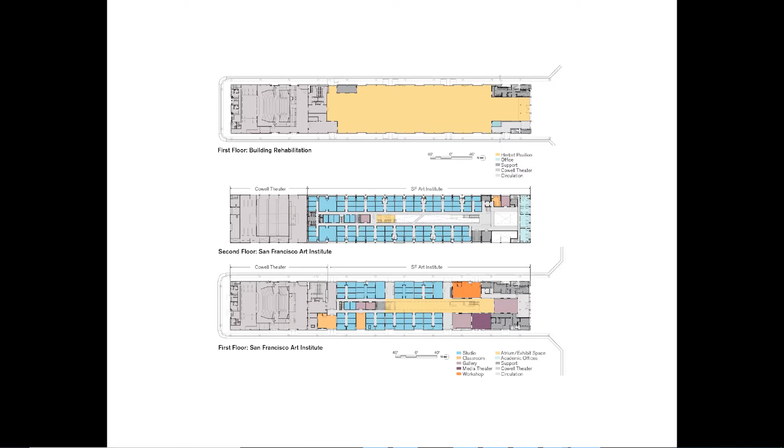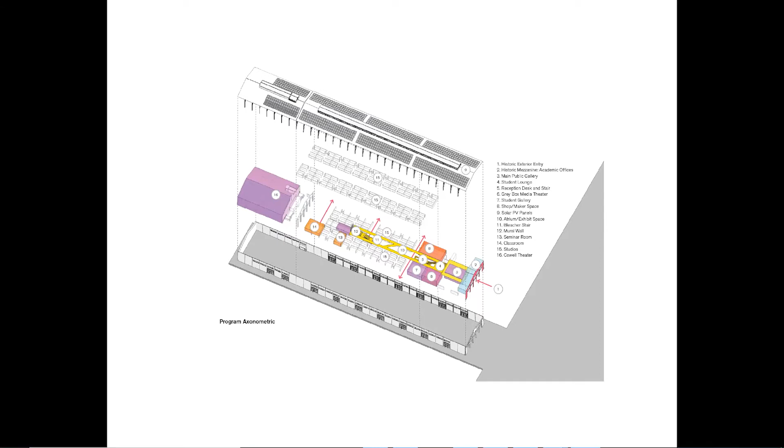And for the classrooms, the second floor needed to be built. Because the historic fabric was really a shed, the second floor had to be pulled away from the exterior walls. Adding the second floor required both the state and the federal historic preservation offices to collaborate. The second floor required additional support columns. The center needed to be kept open so that natural light floods into this space.

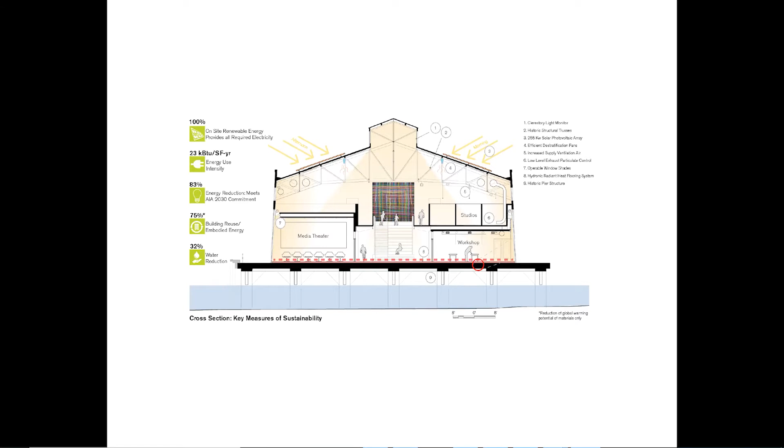And you can see how they inserted the second floor into this historic fabric and pulled it away from the walls. And the topography of the bay is actually not flat, which really isn't surprising. There are a lot of variations in it.

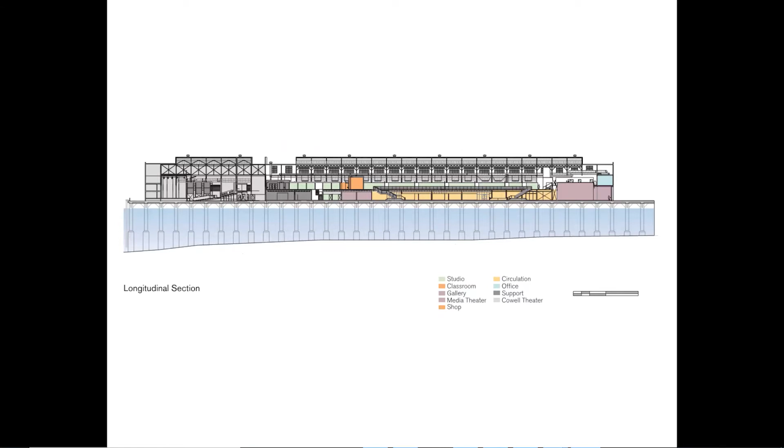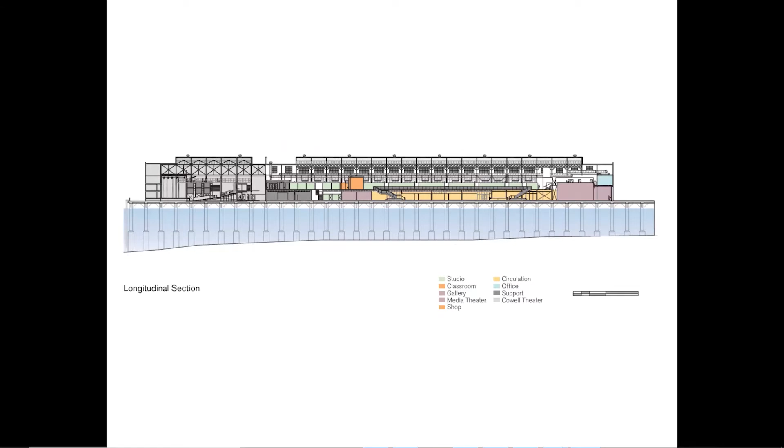And I mentioned the first phase, which started in the early 90s, was to stabilize these pier foundations. And this was done through arts funding. And it's really a testament to the strong political leadership of Dianne Feinstein and Barbara Boxer. And this was really key to preserving this as a cultural resource for this community, because this project wouldn't have been able to have been done without it.

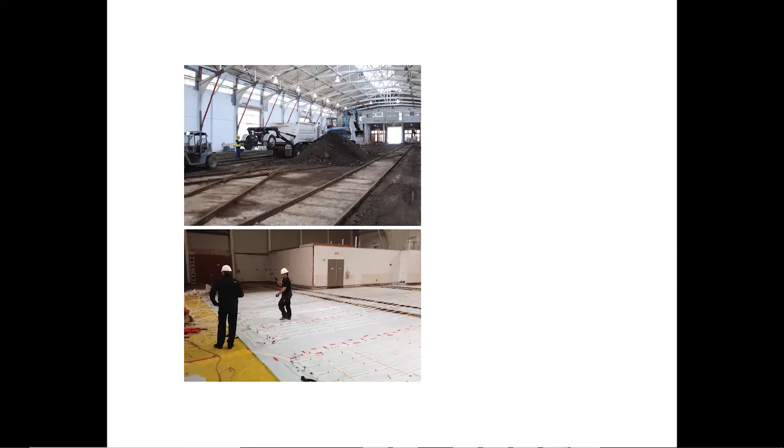This is an image of how they actually got the radiant lines to be placed between the railroad lines. It was very tricky and it had to be worked out with the building and the engineers. And there's a detailed diagram of the radiant slab. It protects this space from San Francisco Bay.

And the radiant slab system was chosen for many reasons, not the least of which it eliminates blowing air through HVAC ductwork, but it also gives us much better user comfort. It's also a lower first cost investment. So for the design team, it was a relatively easy sell for the client, but you can see the difference between an insulated slab and one that is uninsulated. So the money that you spend on the radiant slab is really a huge bang for your buck.

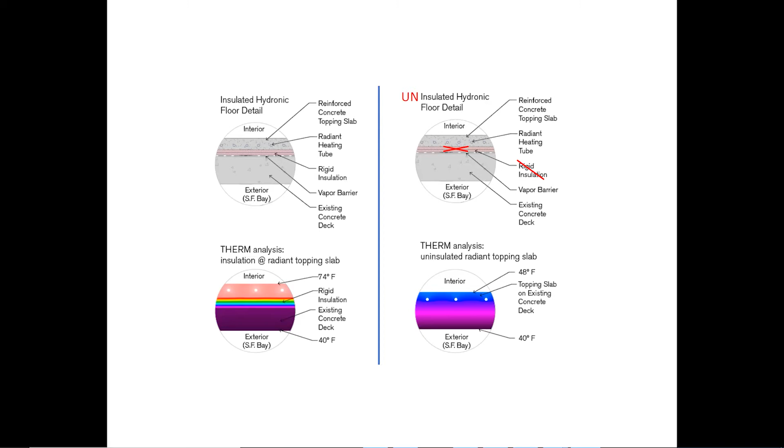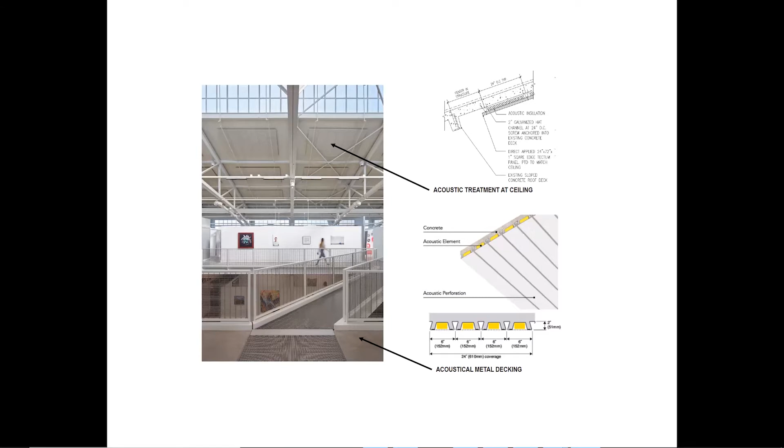And you'll find throughout this presentation that I'll be talking about a lot of elements that do more than one thing, and the radiant slab is one of those elements. The historic fabric had to be maintained. So the acoustic treatment at the roof was actually installed between the historic roof trusses. And then for the mezzanine that was inserted, the acoustical material was actually inserted between the metal decking flutes so that it essentially disappears.

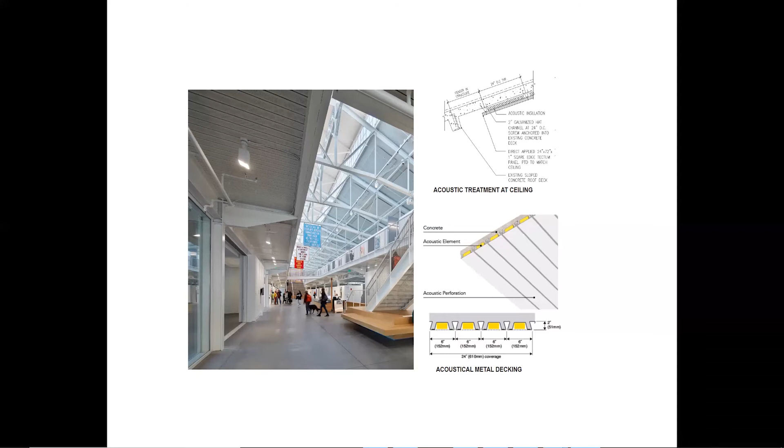Daylight studies were conducted so that spaces could be organized by type. The Black Box Theater is located on the first floor where there's no natural light. And you can see that the building performs very well with huge improvements at all levels while still maintaining the historic fabric. The addition of the solar panels on the historic roof was a bit of a challenge that had to be overcome by the design team, and it was a bit of a push and pull throughout the process to get the Historic Preservation Office to allow some of these elements to be installed.

And the State Historic Preservation Office was really instrumental and was an advocate for the design of this project and helped collaborate and push the National Historic Preservation Office to allow this project to be built. There were many instances of collaboration between the design team, the Historic Tax Credit Committee, the National Park Service, the State Historic Preservation Office, and multiple owners' representatives. And it's really a great story of how all the team members came together to make something new while maintaining the history of the place.

This shows an example of how the design team inserted the new spaces, the first and second floor, and how they're pulled away from the existing roof trusses at the top and at the walls. This is one of the ground floor studios. And it's really a great resource for the community, and it continues the arts legacy that has been at this site for literally decades. But it's a great example of how tenacity, perseverance, and not taking no for an answer are traits of successful team members. And really, it was the only way that something like this could get completed successfully.

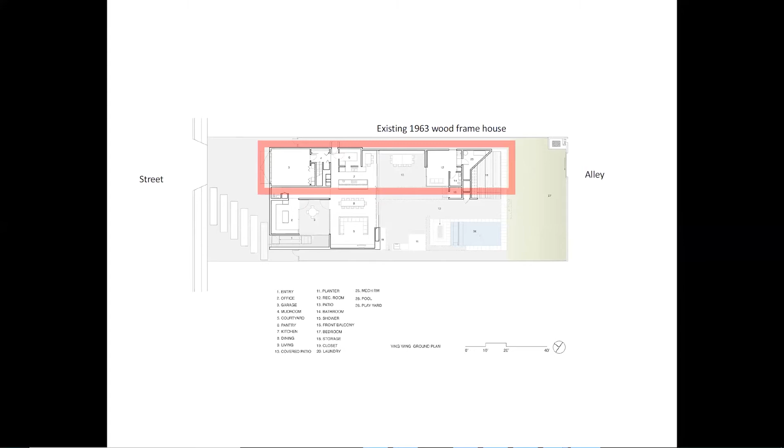It's a relatively large lot for Venice. It's about 70 feet wide by 150 feet deep. And there was an existing 1963 wood frame house on the site. So we saved some of the foundations and the framing of the existing house, added to it, and then used the volume of the house to enclose some of the exterior space so that we could open up the volume of the house and blur the line between the inside and the outside.

We made sure that good cross ventilation occurs in all spaces and that the floor plates were very narrow so that we could get natural light from both sides. We oriented the solar system so that it also shades the second floor walkway. And we used a radiant floor slab, like in the last project, to both heat and cool the spaces of this house. It was a lower price point, and it's a much more efficient way to deliver thermal comfort. We used a rooftop garden to capture stormwater, and that also provides a really nice green space at that level, which opens to the bedrooms that are on the second floor.

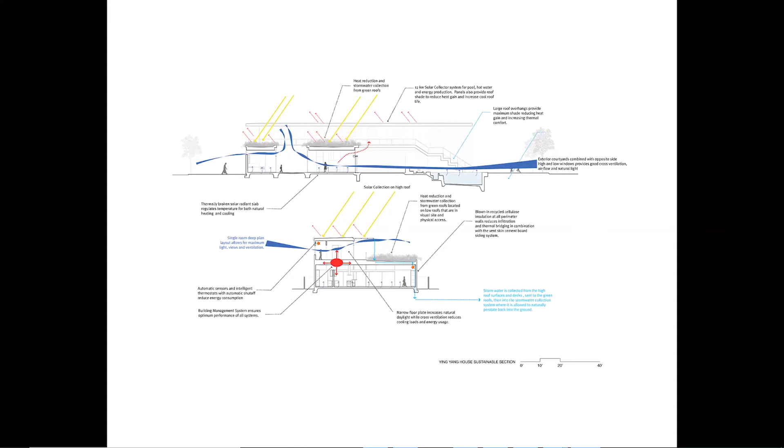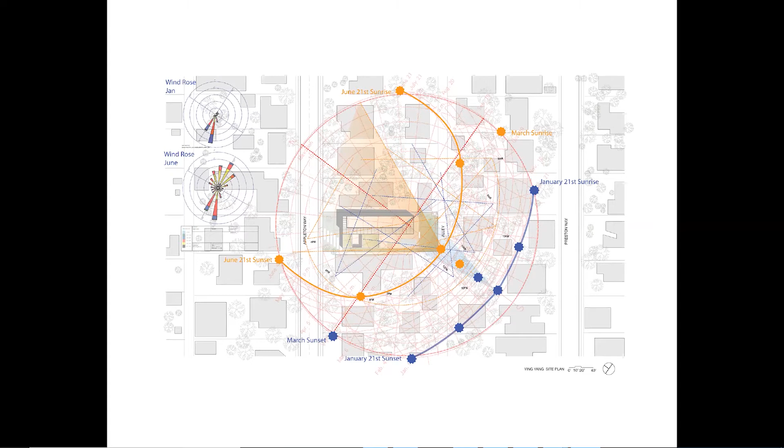The wind rose and the solar orientation helped us identify how the volumes should actually fit on the site, and the wind actually comes into the side of the house and not from the front side. So from the street, the house appears like a solid mass with a second-story balcony. But the solid wall actually incorporates a garage door and a front door to the right.

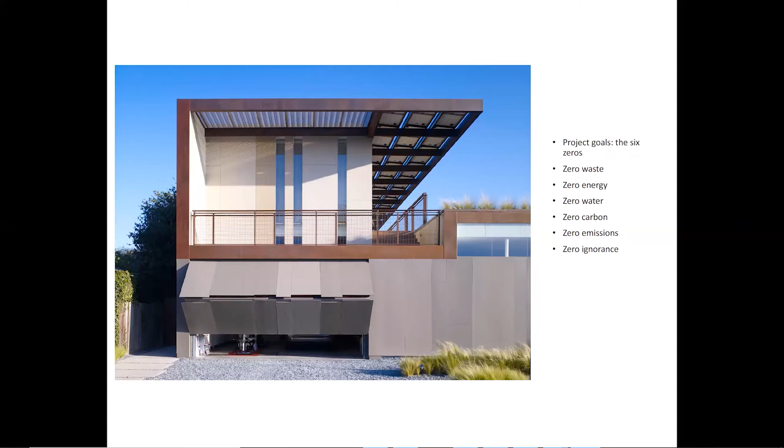So we had 6 goals that I cribbed from Steve Glenn of Living Homes, and the 6th one is zero ignorance. And what that means is really, it's the concept that less bad does not mean good. So we had a lot of goals, and we worked with the client to make something that everyone was happy with.

The radiant floors have an exposed aggregate finish, which is very warm, and the narrow spaces have cross ventilation that works really well. We covered the exterior patio that faces south, so you can open up the sliding glass doors completely so the kitchen and dining area is open to the patio, and it extends your living space into the backyard. The client likes to cook and teaches cooking from this space, so the kitchen is really the centerpiece of the ground floor public space. The blown-in insulation that we used actually creates a much better insulated wall than batt insulation because it fills all the gaps.

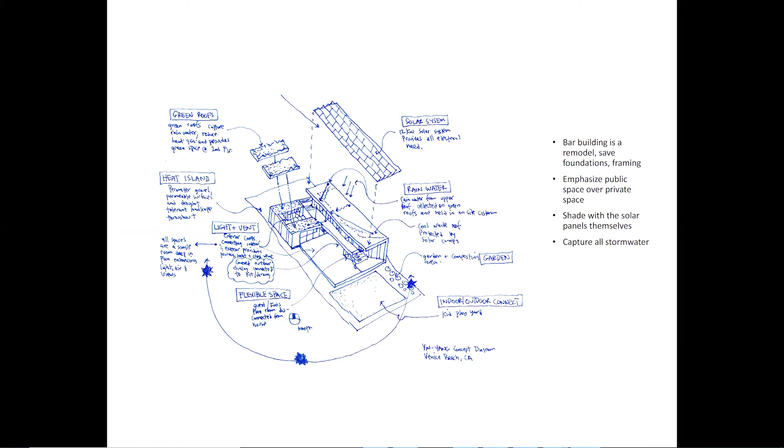And after we finished, the clients were really happy. They didn't get a utility bill for about a year, but what they told me about 3 months into that was that they also weren't getting their trash picked up. And that was because with the utility service, which is the Los Angeles Department of Water and Power, you have to pay for your water and power and trash pickup with one invoice. And so if you're not getting an electrical invoice, you're not paying for trash pickup either. So solid waste wasn't picking up their trash.

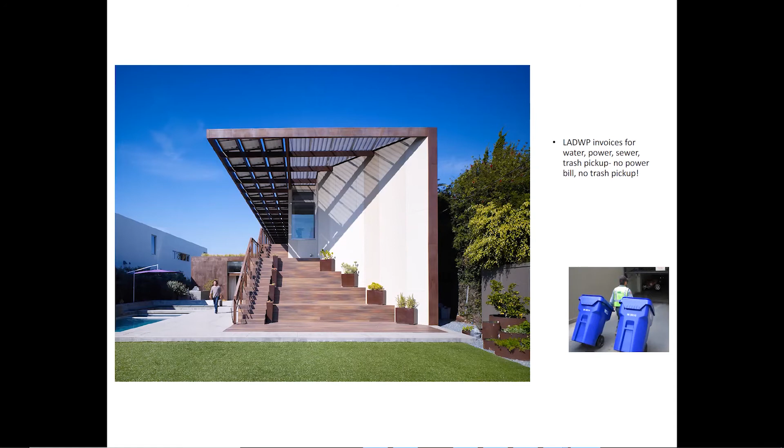I think it took them about 10 months to get that resolved, but it's a good example of how the best intentions of policy sometimes don't trickle down to everyone in the supply chain. We work with several nonprofits, and the next project is one of our affordable housing projects. We, for a long time, have been advocates of the integration of good design in underserved communities and building types for people who traditionally can't afford to hire an architect.

So my partner with Katie Swenson created what's called the Affordable Housing Design Leadership Institute. And this group meets once a year. It brings developers together with designers. And the idea is to help these developers with one of their real projects, because we came to realize that 70% of the design decisions are made in the first 10% of the process, and that is generally before the architect is hired. And a lot of the reports that they've done are available for free on their website if you're interested.

The third project that I'm showcasing is called The Six, and this is located on our previous parking lot. The project is infill housing in a multifamily neighborhood called MacArthur Park, which has one of the highest densities in the US with over 38,000 people per square mile and a total population of 120,000 people in about 2.7 square miles. The neighborhood is called a Walker's Paradise with a walk score of 95 because it's near really great transit, amenities, and bike lanes. Most of the previously homeless veterans that live here don't own cars, and they can accomplish all of their daily activities easily without one.

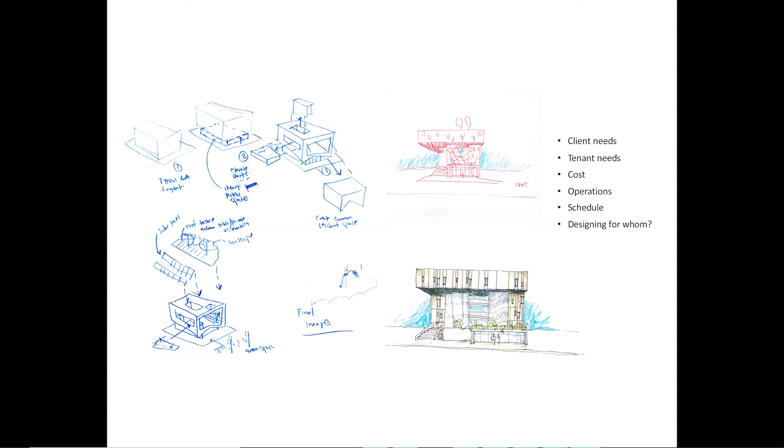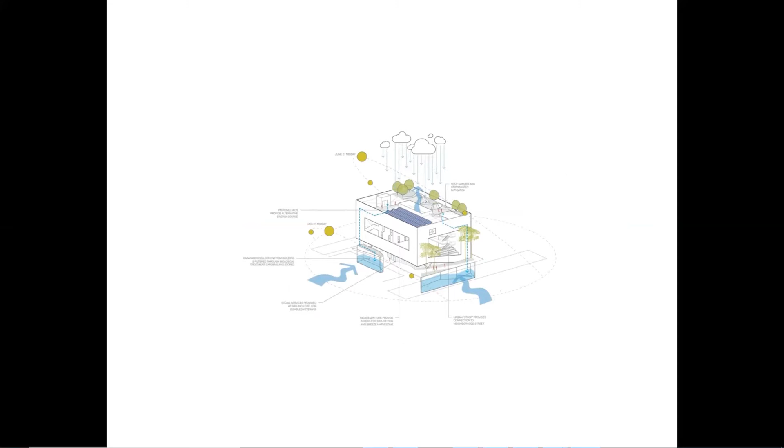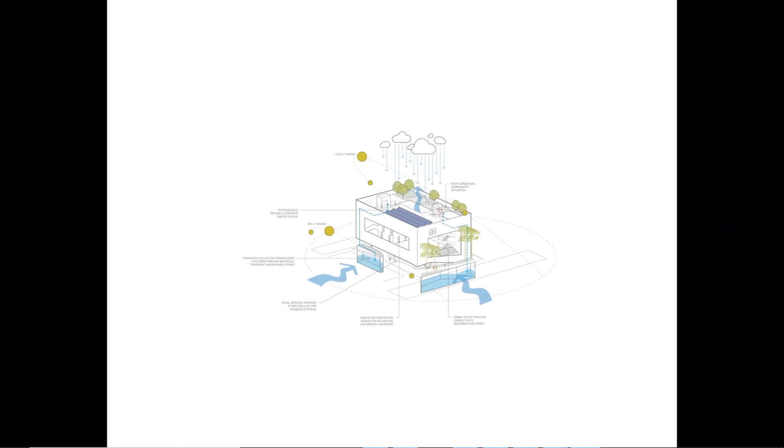So we redesigned the building to make a more secure entry. This diagram shows the various elements that we incorporated into the project. A roof garden, what we call an urban stoop in the front of the project, which is a stepped courtyard planter. It's not physically connected to the street, but it's visually connected to the street. There are various apertures for courtyard ventilation, and because this is a relatively large project, there are large apertures on 3 sides of the building itself.

And again, I think this courtyard is really the lungs of the building. There are social services and a computer lab on the ground floor. There's rainwater collection and 2 linear planters, and we have solar hot water panels on the roof and a solar PV system on the roof.

When the design was updated to allow them to have a secure courtyard, we changed the way people entered this project so that instead of going straight into the courtyard, they went into a side yard. And this could have created a very defensive looking building, which we really didn't want, and our client and the user group didn't want that. So we worked really hard to make the courtyard physically separate, but have it appear connected to the street.

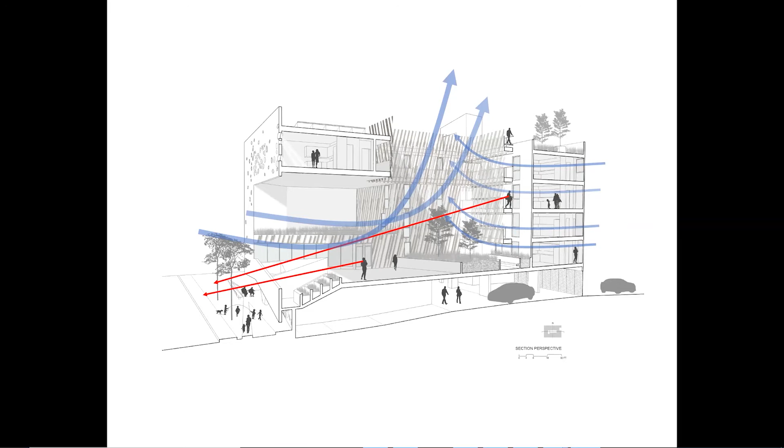And with this step planter that actually lowers the edge of the courtyard to the street, it allows us to eliminate what is really essentially a guardrail, so that you can actually be in the courtyard and see into the street, and you feel very connected to it. The project has been designed with as much landscaping and permeable surfaces as possible, and all of the impermeable surfaces are directed to on-site planters.

The courtyard is really this amazing social gathering spot, and it's open to the main kitchen and recreation space, which is on the 2nd floor, to incentivize the tenants to socialize. Even though it's a completely secure building, we were able to create a public front that appears open and inviting. And out of challenges really comes opportunity.

I'm sorry, I lost my images. Ian, can you maybe let me take control? See what I can do. Thank you. So I'm going to continue talking while we're trying to get the images back up.

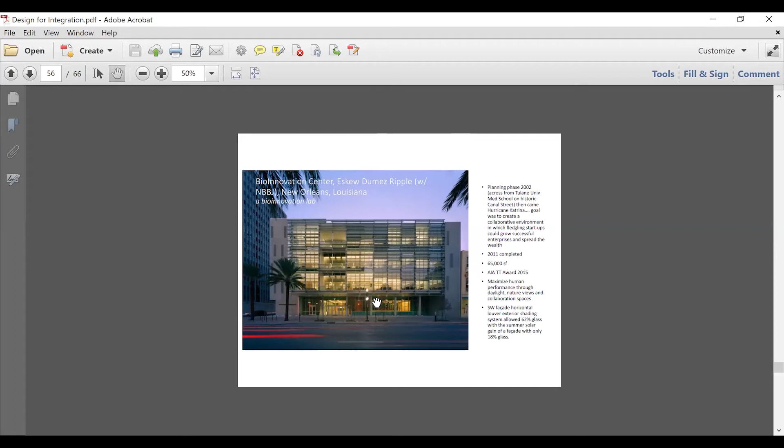Do you guys want to go back to the spot? Yeah. Oh, wait, so give me control. Okay, Angie, I think I got you to the start. Okay, I'm just gonna go back to here.

Okay, thank you. One thing that I didn't realize, but realized as we were starting to look through the top 10 measures, as we were designing this project, is that LA County lies along the Pacific Flyway, which is a major north-south route for migratory birds. And the rooftop planting that we provided was really important, and it played a key role in Los Angeles's ecosystem.

We know natural light gives a lot of benefits, not the least of which is that we feel better as people being in the space, and we have more energy. And we know as architects and designers that there's a direct correlation between ceiling height of the window, and amount of natural light in this space, and also structural efficiencies, shear walls and wood frame construction. So our windows are always tall and vertical, and they make the space look much nicer.

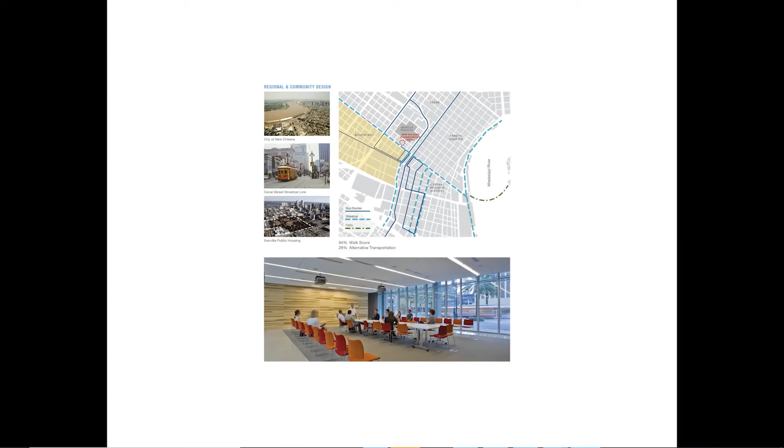The project helps local innovators develop new businesses in a very New Orleans way, with a spatial organization that promotes chance meeting, social interaction, and improvisational collaboration, which is not a great idea right now, but it invites busy people to linger centered on the porch or the garden. The informal ties between people are really key to this city's resilience. And the area has a walk score of 94. Nearby housing has been built, and it's really a walkable, all income level, live work environment and neighborhood.

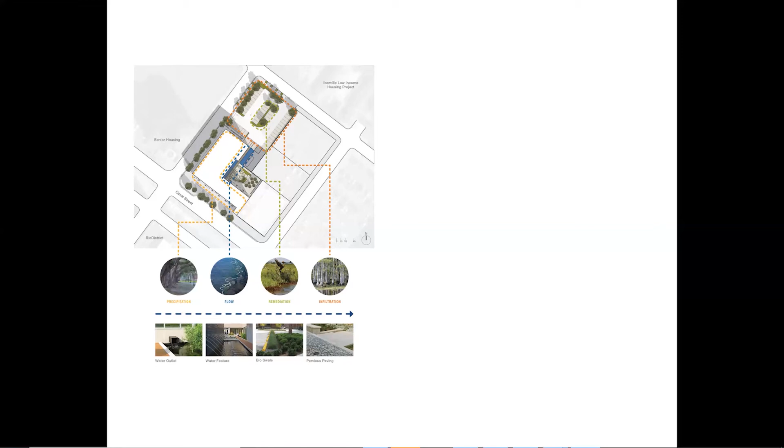New Orleans is subject to intense rain, flooding, and hurricanes, and has been described as a bad site, but an excellent situation. And the same is true of this project. It sits on a brownfield with excellent urban density, adjacencies, and access to public transportation, but had contaminated, poorly draining soils. So after the brownfield was cleaned up, there was minimal on-site parking provided that was permeable. And this was actually the first pervious concrete installation in the entire state. And it was built on top of 18 inches of crushed stone, which provides stormwater storage, biofiltration, and it recharges the entire site.

This pool is fed by rainwater from the roof, and it goes into the courtyard water feature, and the stormwater is filtered by these marsh plants. This is the regional water plant soil ecosystem in a microcosm, connecting people back to place. Simulations project that stormwater will leave the site only once every 20 years.

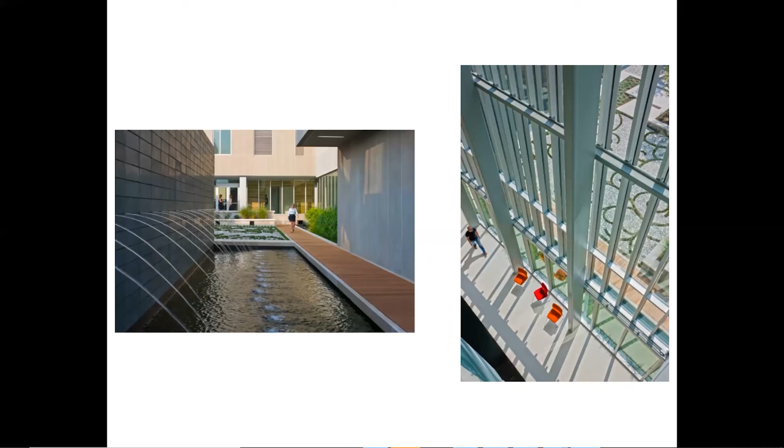This water feature is also fed by the AC condensate, which provides all the landscape irrigation. And this is currently the only use allowed for captured water by state regulation. No potable water was used for irrigation, and 100% of the stormwater is managed on site.

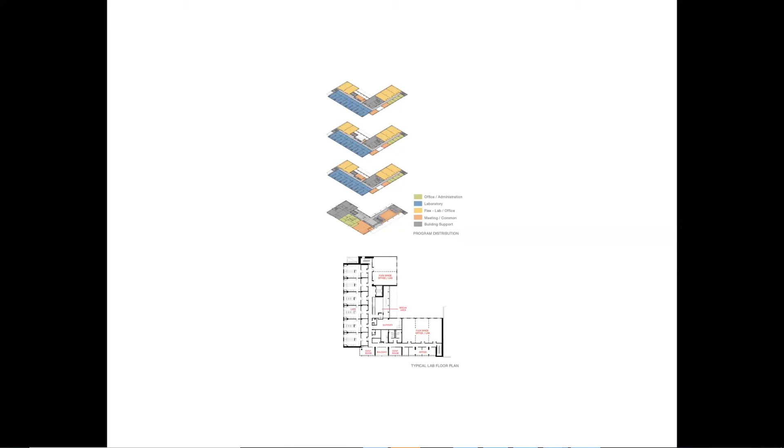The plan layout includes a mix of dedicated lab and office spaces and an almost equal area of flex spaces with infrastructure to accommodate lab uses, but which can be alternatively built out to offices according to the needs of the tenants. The key building structure and shell components were designed with a 50 to 100-year service life. And careful design and modeling of the air distribution system allows lower air change rates to be employed without compromising safety.

And this level of performance was achieved through a combination of an efficient building skin, employing strategic glazing with solar controls, highly targeted controls of airflow and temperature, and lighting for virtually every space, and an efficient central plant. New Orleans receives 62 inches of rainfall annually, roughly equal each month, and the local utility company that provides water and handles stormwater runoff is also simultaneously the single largest municipal greenhouse gas emitter. So reducing water use and stormwater discharge can have a tremendous environmental impact, and this courtyard allowed the design team to do that.

Eskew Dumez Ripple as a firm, I believe, is really setting the standard for post-occupancy studies. The design team and the commissioning agent initiated a continuous commissioning exercise, monitoring energy consumption, systems, and comfort performance, and they identified a large number of items that they had to further fine-tune. And the project is now part of a commitment of all team members involved to the long-term engagement and learning of this project.